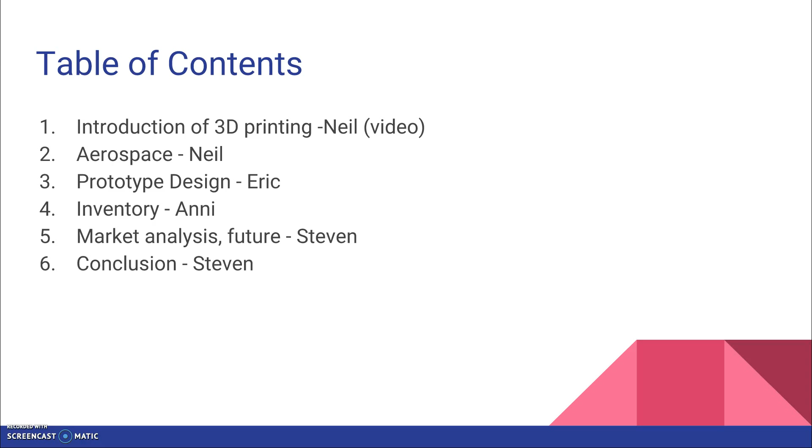So I'm going to talk about an introduction to aerospace. Eric's going to talk about prototype design, and Anni's going to talk about inventory management. Steven is going to talk about the market analysis and the future of 3D printing, and the conclusion.

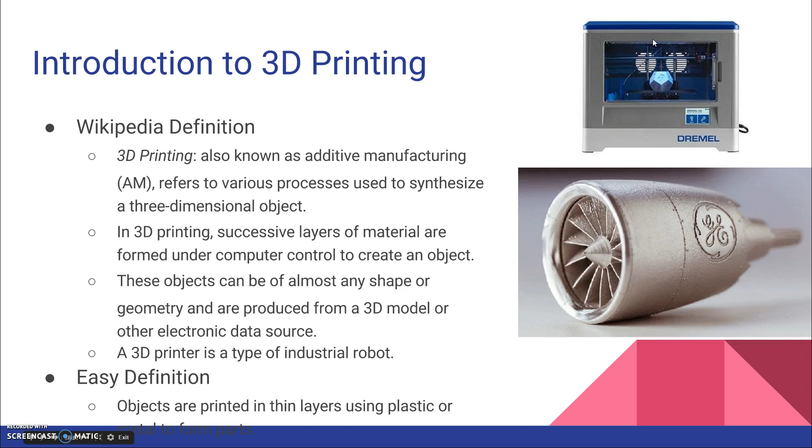So, 3D printing. It's a relatively new technology. Not terribly new, but it started to come out in the 80s, and it's really picked up in the last few years. There's a Wikipedia definition there, quite precise. The easy definition is: you're printing objects in thin layers using plastic or metal, one layer at a time, stacking up like pieces of salami to give you a part. You can see something over here that was 3D printed, and what a 3D printer looks like. There are multiple different types of 3D printers, going from a couple hundred dollars all the way up to millions, and to a certain extent, you get what you pay for.

There are some branding implications, but currently you can't really get a good 3D printer for a low cost for metal. You're going to pay about $30,000 or more for it. But the materials you can print with those are quite impressive. You can print stainless steel, Inconel, nickel, CoCr (which is cobalt and chromium), titanium, gold or silver, and a bunch of others. You can print various grades of these. You can print some really, really strong parts.

You can print parts that are designed to fail in certain ways. You can print parts that are strong in certain ways. You can do a lot of things. And the resolution is less than 0.2 millimeters per layer, so you can get some pretty decent resolutions out of these.

There may be some machining required, depending on the part, to get a very flat surface or something of that nature. But for a lot of parts, you really don't need that except for a couple places. That's where 3D printing really shines. On the plastic side of things, you can get a printer anywhere from $20,000 down to about $200. So any of you in the class could buy a 3D printer if you wanted to. There's a little bit of a learning curve there, but it's not terrible.

There are various materials you can print in: ABS plastic, PLA, which is a plant-based plastic. It's biodegradable, environmentally friendly, and all that good stuff. It's also fairly strong, but it's brittle. Nylon, which is tough. Polycarbonate, which is incredibly tough. And you can get very good resolutions. For that, you're looking more at plastic parts like trinkets and things like that, or brackets, or things that really don't need to be metal. There's a lot of parts that don't need to be metal.

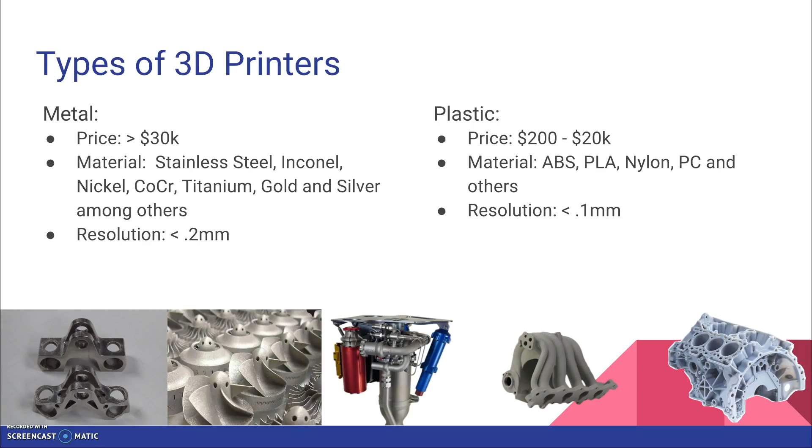So there are various real-world implications, and we're still trying to find that out. Steven will probably talk more about that in the later slides.

So, some 3D printers in action. Let's start with the plastic one because it's more simple. This is actually my 3D printer that I have personally. It's not tuned completely well, but it's good enough to print things. I haven't had a whole lot of time to work with it, but here I'm printing a cookie cutter for my girlfriend.

So this is what it does. It prints layer by layer, and then it moves up a little bit, and then it prints some more.

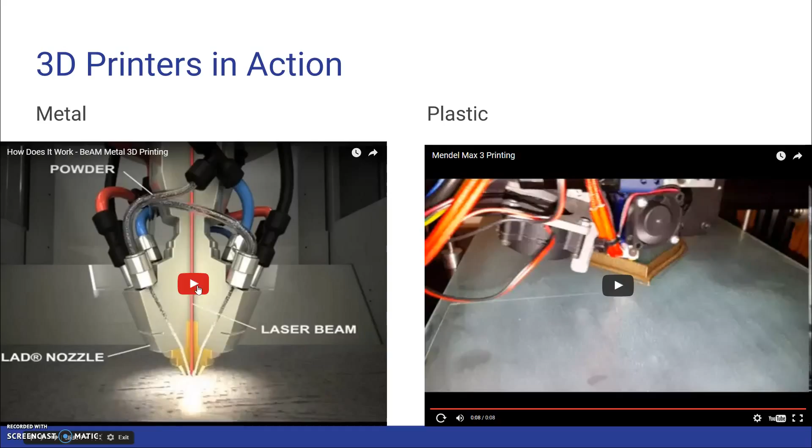But once you get to the metal printers, things get a lot more complicated. This is one that prints metal. It's kind of a long video, so I'm going to skip through it a little bit.

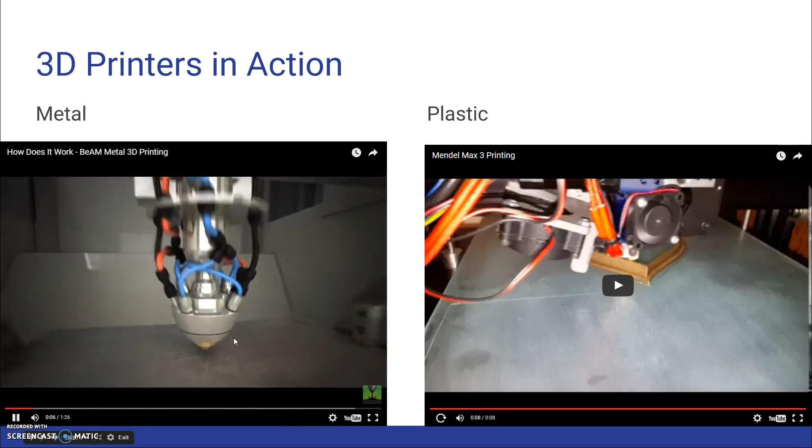But here's the print head. As you can see, it's quite complicated. What happens is the metal powder comes through these tubes and gets injected. It's a very fine powder. Then it goes into the path of a laser beam, and that deposits it.

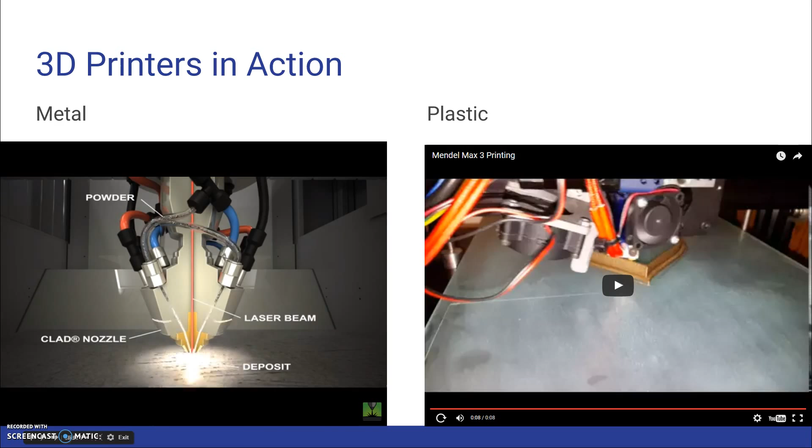So here's a couple machines. This is a very advanced machine, printing what looks like a tube attached to a flange. It has all of these degrees of freedom, so it can print on any angle it needs to, to get the right material thicknesses and density of the part. You have to worry a little bit about parts having voids and inclusions, but a process like this will help you with that.

So for aerospace implications is where it really shines. The supply chain for aerospace requires low volume production, high precision, lowest weight possible, and high strength.

It's basically because it's an additive process instead of a subtractive process. So you start with nothing and you add material versus starting with a big chunk of material and removing material, where certain parts are conducive to one process or another.